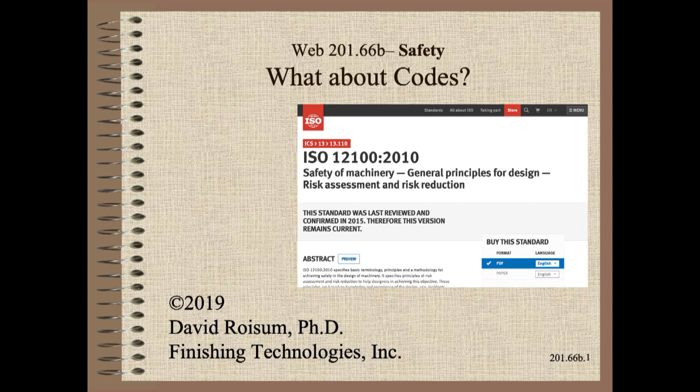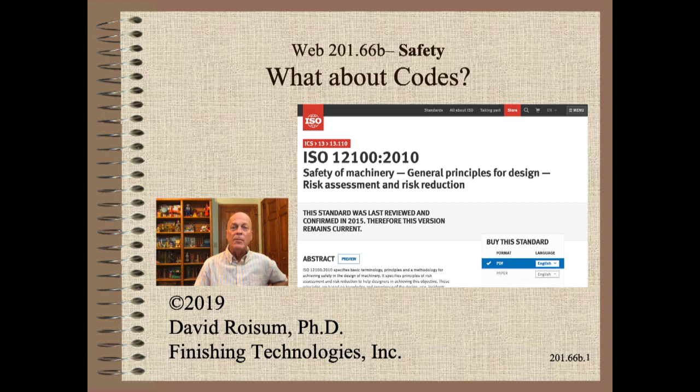In the last clip, we covered some case histories of serious accidents on web machines, as well as a few best practices to avoid them. In this clip, we talk briefly about codes and standards.

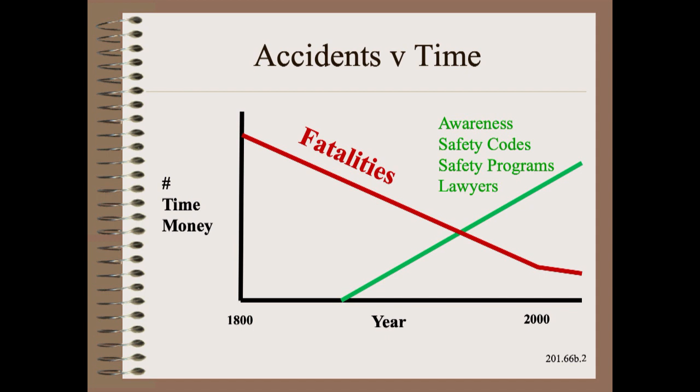What I and many others have observed is that, thankfully, the number of serious accidents has decreased quite noticeably over the last 200 years. Whether this is due to awareness, codes and standards such as discussed here, practices such as discussed last time, lawyers, or some combination, is hard to say. Yet, this trend to fewer deaths is slowing. We still have the occasional serious accident, at least some of which are preventable, perhaps by the ever-evolving codes we discuss here.

I must acknowledge that the next few slides are entirely the hard work and skills of Clarence Klassen, who has graciously allowed me to use them for the good of all. However, these codes and standards are ever-evolving and ever-changing and can be difficult to keep up with. See Clarence's AIMCAL blog for the latest annual update to this list.

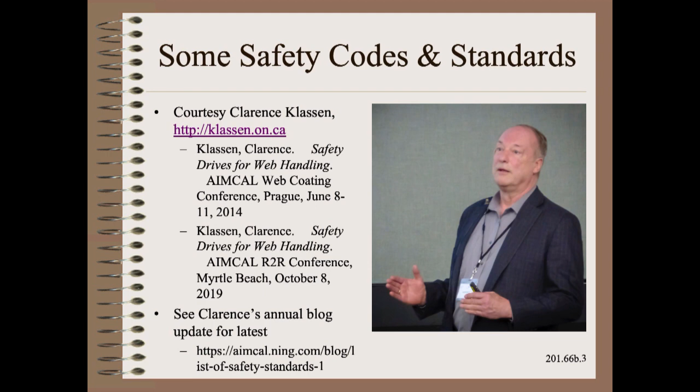The American National Standards Institute was formed in 1918 as a way to improve interchangeability of parts and measurements, as well as to improve quality. About 20 years ago, they started to take on web machine safety in earnest. While these codes originated in the film industries, other industries may also be guided and bound by them when applicable.

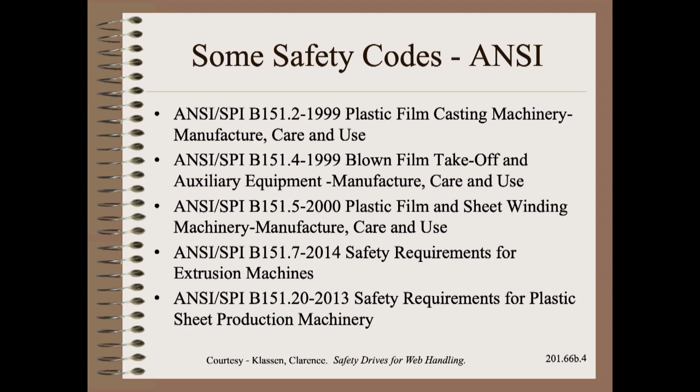The German Institute for Standardization is the German ISO member body. Similar in many ways to ANSI, its founding a year earlier was to improve interchangeability. Similar to ANSI, it took on safety about 20 years ago, but primarily in the paper industry rather than film.

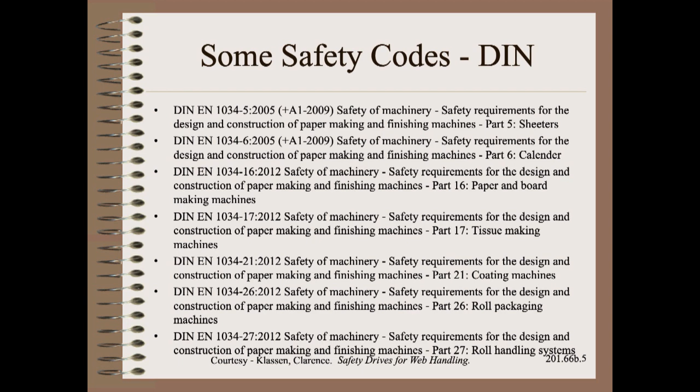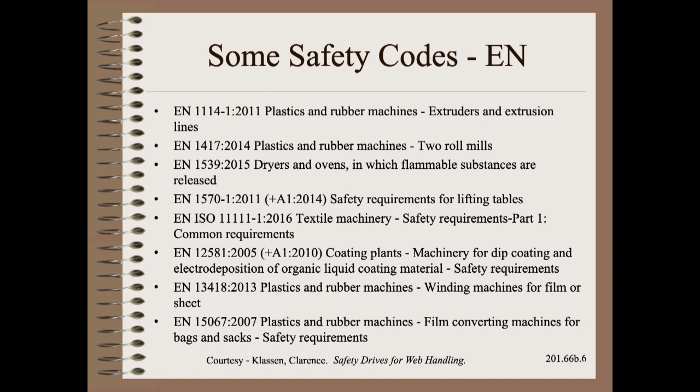CEN and related organizations are more recent, but in many ways more stringent, at least in regard to safety.

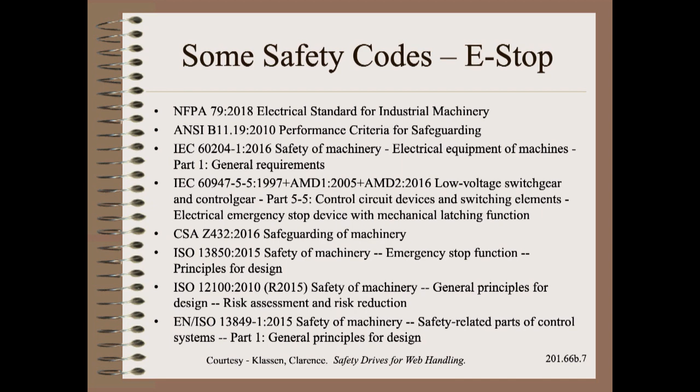Being able to quickly and safely stop moving machinery is a must. However, what quickly means depends greatly on which machine you are referring to. While your lawnmowers are now required by the U.S. Consumer Product Safety Commission to stop blades running at top speed within 3 seconds, paper machinery could take the better part of 3 minutes to bring their machine to a stop. The reason for the difference is the multi-million-fold increase in large rotating roll inertias, which makes stopping in seconds quite practically impossible. Thus, current best practice is a maximum safe deceleration of all drive points, perhaps sized for no less than 300 feet per minute per second or 100 meters per minute per second.

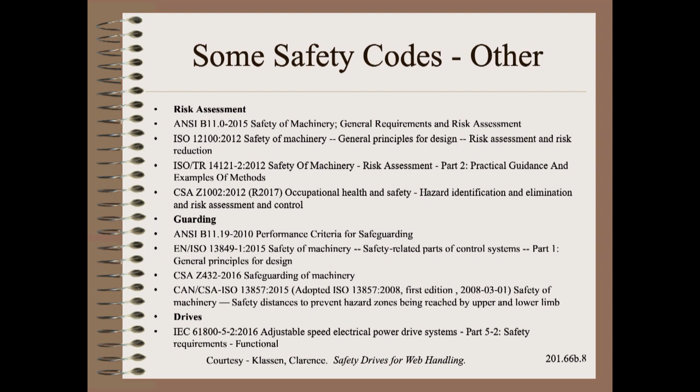Finally, there are many other useful safety codes and standards. One of the most recent areas is risk assessment. This was loosely derived from the aviation industry, who developed failure modes and effects criticality analysis methods decades ago. It tries to anticipate failure modes, probability, criticality, and how to minimize each.

Some components are safer than others. Here is a ranking from least to most safe.

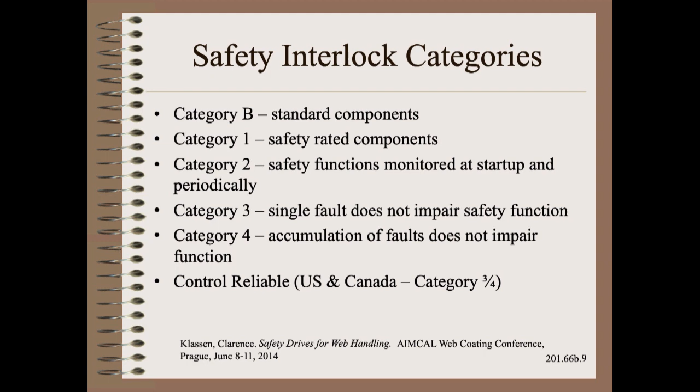Stopping time was briefly mentioned earlier. Here are the categories that you are likely to run into on web machines. The typical equipment you find in the web industries has a category 0 or 1 rating. Much of the small equipment we see, such as power tools and compressors and our idler rollers, merely coast to a stop. Web machines usually have active braking via motors and mechanical brakes, or some combination, but only at their drive points. Internet searches reveal a plethora of web pages on stopping time measurement methods and requirements.

However, I could not find any related to stopping rates. When I was working at Beloit, we sized motors and brakes for no less than 100 meters per minute per second for winders under e-stop conditions. Unfortunately, the high speeds and inertias on paper machine winders meant they took minutes to come to a stop, making the precise stopping rate somewhat of a moot point for mitigating the severity of accidents.

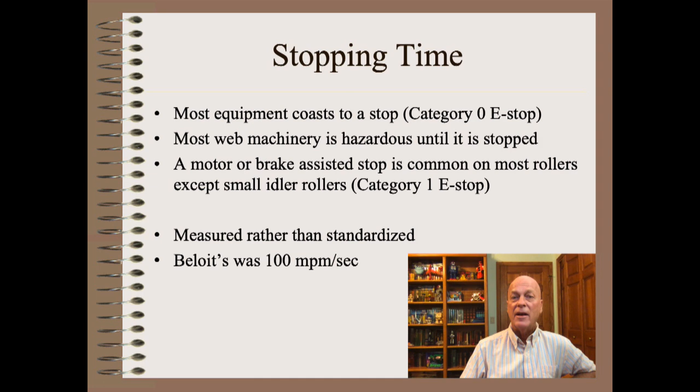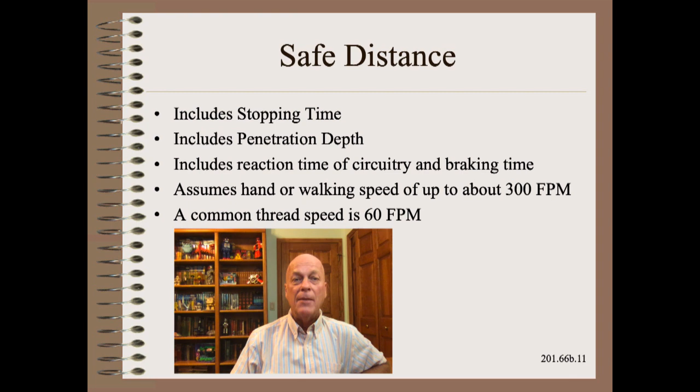Safe distance is a computation involving the factors that affect the required stopping time once a presence sensor detects an operator in its path. These are primarily involved at low or thread speeds. At higher speeds, we would need to fence the hazard areas, as stopping fast enough is practically impossible, as discussed earlier.

There are many types of presence sensors that all have their pluses and minuses. Until recently, the safety mat was the most common. However, this is not a Category 4 component because it can fail open without notice. Also, they can be a maintenance nuisance by failing closed if somebody drops something on it.

Light curtains seem to be the most common now. However, ultrasonics offer the advantage of a programmable perimeter.

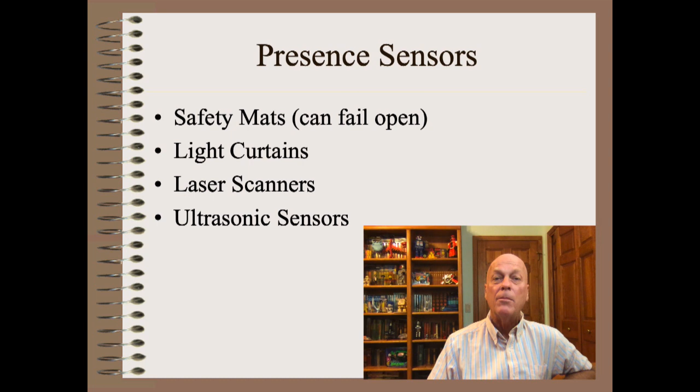One thing we noted last time is that many, if not most, web machine accidents occur at a crawl, jog, or thread speed, which is about the speed you walk at. Please see the previous clip to show why a crawling speed is so very dangerous.

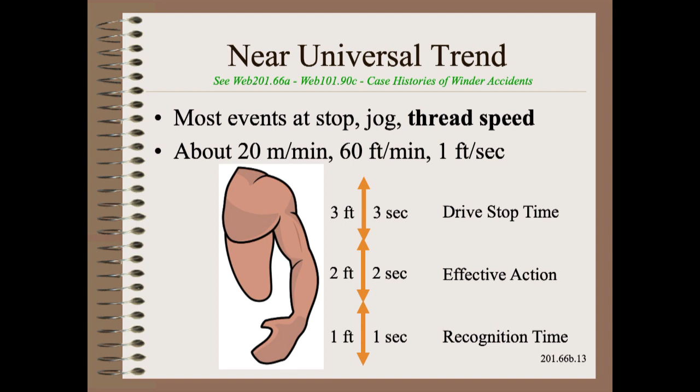Do codes prevent accidents? Great question, but it should probably be rephrased as, do codes prevent some accidents? The answer to that question is certainly yes. Some accidents, but not all accidents.

First, codes are not always clear as to when they apply and what they apply to. There are many loopholes when the industry has no safer solution. An example here is the guarding of a light airplane propeller is so inefficient that it would not allow the airplane to lift off the ground and is thus not required. However, guarding of props on airboats and some powered parachutes can allow function and is thus the norm.

Risk assessments try to anticipate accident modes, but the process, being an entirely human endeavor, is imperfect. We don't have a perfect crystal ball.

There is a gallows humor joke that states if you make an 8-foot fence, the operator will find a 10-foot ladder to go over it. There is a similar joke about warning labels on those ladders. Also, perhaps most salient for most of you is that older machinery may not need to be compliant to newer standards.

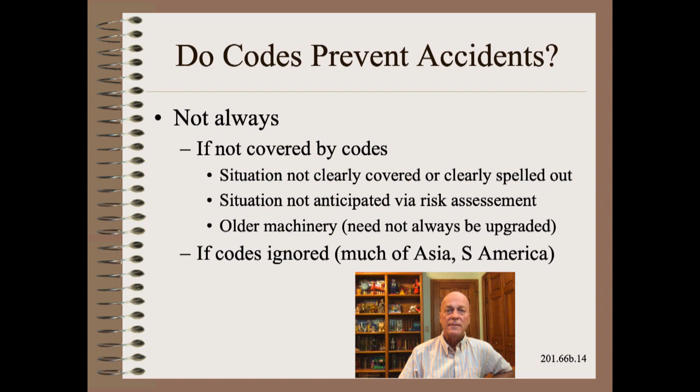With only one OSHA inspector for every 60,000 industrial workers, it is very unlikely that some government inspector is coming in unannounced and inspecting your machine for compliance with the latest codes listed here. Yet, that is exactly what is done in other industries, such as the FDA for drugs and the USDA for food processing plants.

None of the organizations mentioned above has much legal authority or much of any enforcement mechanism. An exception here is that some countries will require compliance for some sections of the code on some new machines, and they can enforce it. This is different than, for example, the FAA, who can require old airplanes to do inspections and replace parts that may have been in service for decades.

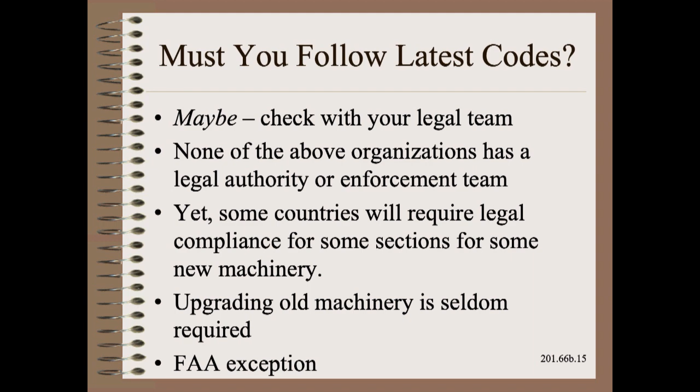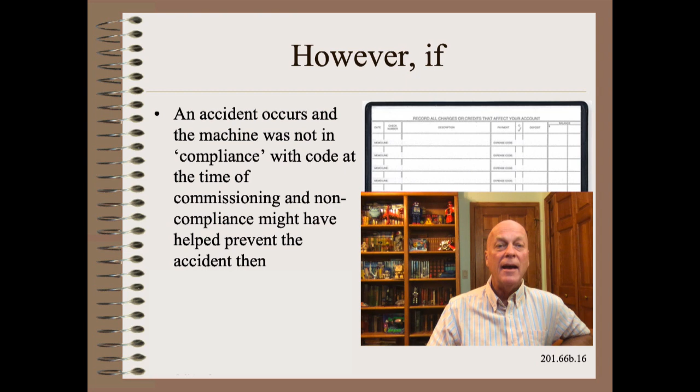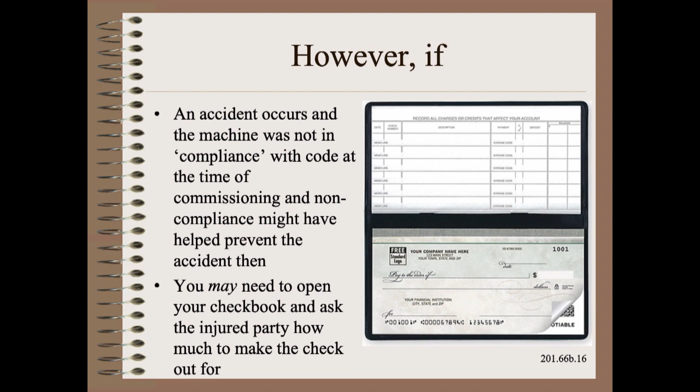However, if an accident occurs and the machine was not in compliance with code current at the time of commissioning, and non-compliance might have helped prevent the accident, then you may need to open your checkbook and ask the injured party how much they want the check made out for. Also, at that time, you will likely get a thorough inspection by government officials, that is, OSHA.

Generally, codes can make workplaces safer. Generally, safety programs can make us safer. But you can still get hurt. Compliant behavior is not necessarily risk-free behavior. Be aware, be smart, and be safe.